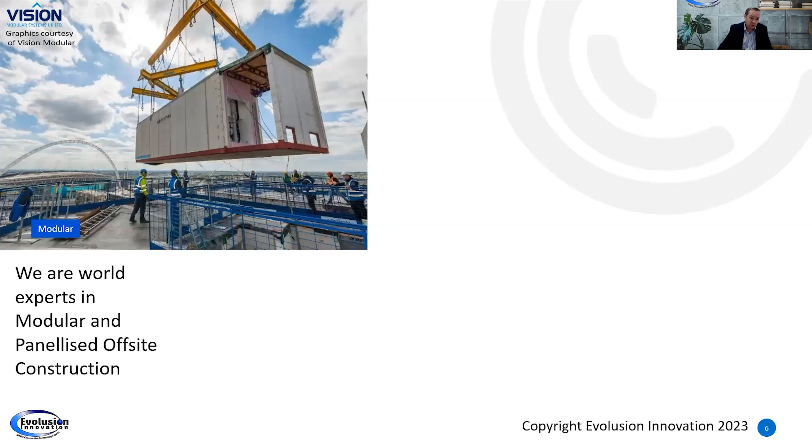Just a quick brief overview: we're in existence 12 years. We've grown to 45 in the team, 4 office locations, and our plan is to go to a 6 million turnover in the next 3 years. We're world experts in panelized and modular construction, as you'll see there. So you're seeing some examples of what we do. Basically, we're comprised of 4 departments within Evolusion.

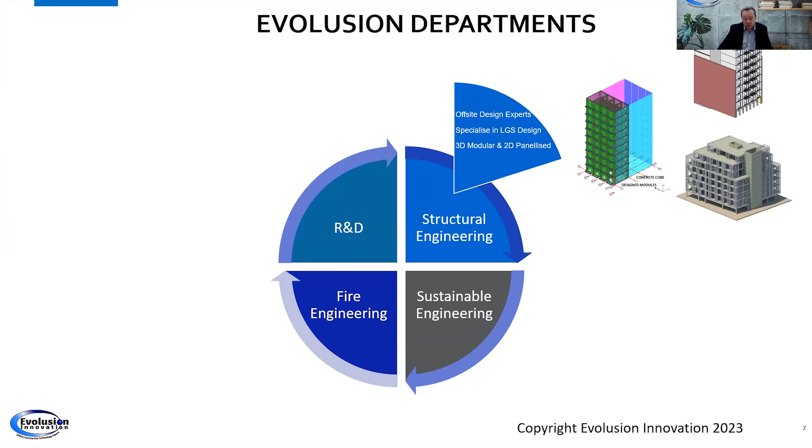Our first department is structural engineering, and we specialize in light gauge steel and 3D volumetric design. The second area is really in the R&D sector, and this is where today's talk will focus. We specialize in getting third-party certifications for MMC products, and we help companies develop the products, and we manage structural fire testing.

We would do about 75 structural fire tests a year, varying across all sorts of tests for different manufacturers. Our new area of expertise is thermomechanical modeling for high-risk buildings, particularly high buildings, where we do a lot of heat transfer modeling and thermomechanical modeling. It's a new area coming from the Building Safety Bill in the UK. We also have a sustainability department, which focuses heavily on embodied carbon value engineering.

So it's a big part. Obviously, embodied carbon is huge, and we have a big department in that. So as you can see, it's all interlinked. We have structure, we have sustainability, and we have fire, basically.

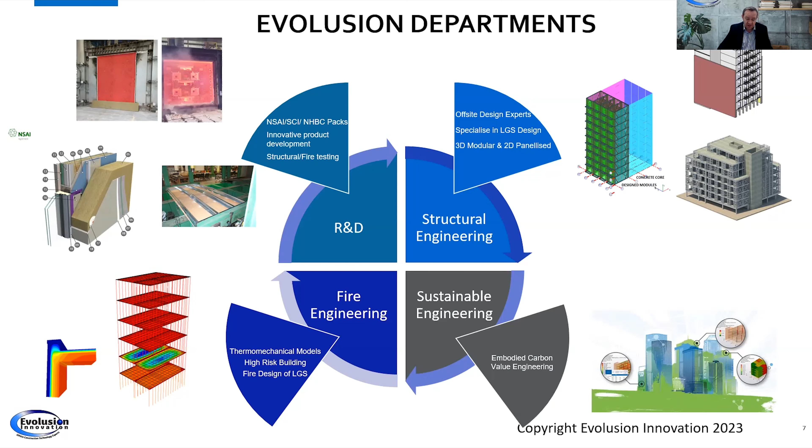We offer loads of certifications, and all these certifications, where appropriately, are third party independently certified. So the final slide on us.

Just to show you our track record, we've done over 2,000 educational buildings, 2,000 healthcare, 8,000 hotel beds, over 10,000 in the resi sector, and over 12,000 student accommodation sector, all in the MMC sector. And we're central to developing and certifying over 20 different building systems in the UK and Ireland.

So today, as mentioned, most of you are probably familiar with the categories of MMC, but in the UK and Ireland—I'm conscious we have a lot of people from the States here on the call today—we have these 7 categories. I'm not going to bore you, but today we're going to focus on category 1 and 2.

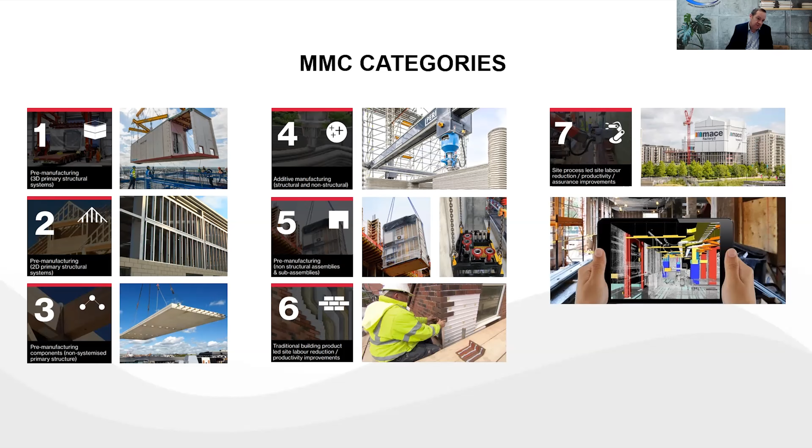Category 1 is 3D volumetric, and category 2 is what we call a structural panelized system. We have the other 5 categories, and we work in the other areas, but today's topic on fire is going to focus on the first 2.

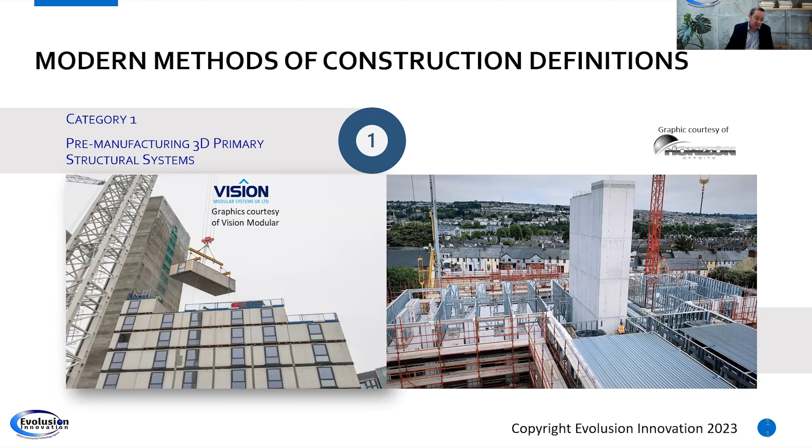So just so we're clear, on the left-hand side there, you see a typical category 1 system, which is a 3D volumetric system. On the right-hand side of the screen, you see a typical structural LGS system. All the systems today are structural. So you can see the difference in the technology—one is a 3D volumetric, and the second is a 2D panel system.

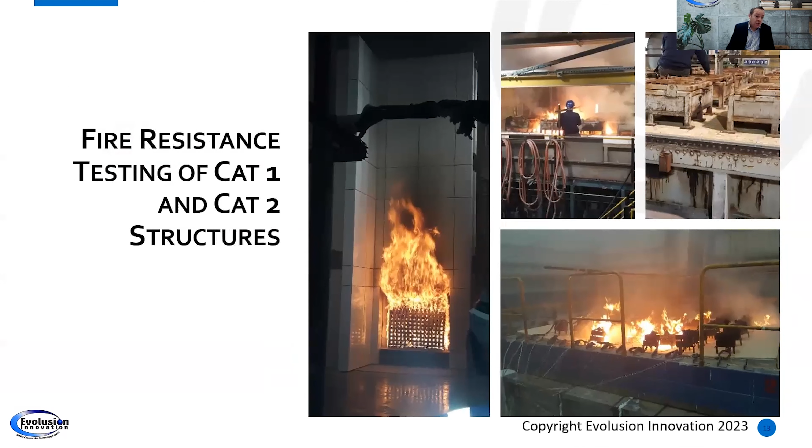So today we're going to focus, as I said, on fire resistant category 1 and category 2 structures. Before we get into that, I'd like to clear up something we find from a lot of people in the industry about non-combustible products. We have a standard called EN 13501 in Europe, and that recognizes combustibility of products.

It's very important that everyone on this call understands that non-combustibility does not mean any good fire resistance. It's very important, the classification of fire spread—that's got to do with flame spread, ignitability, smoke production, heat release, and capability to produce flaming droplets. So it contributes to the fire.

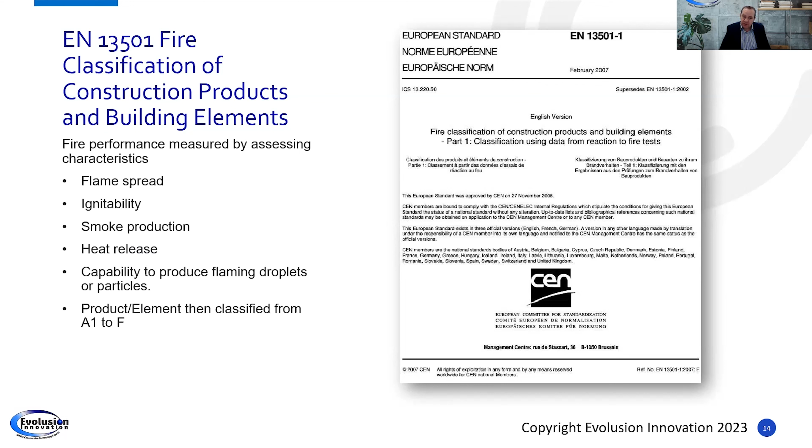But what's very important, the misleading thing we get with some of these products, is that a non-combustible product doesn't necessarily mean the product is any good at fire protection. It just doesn't add to the fire, and that's key. A lot of people use products and materials that may be non-combustible but have no fire resistance, and they're being used in fire resistance situations. So it's very important people understand the difference between non-combustibility and fire resistance—they're not the same at all.

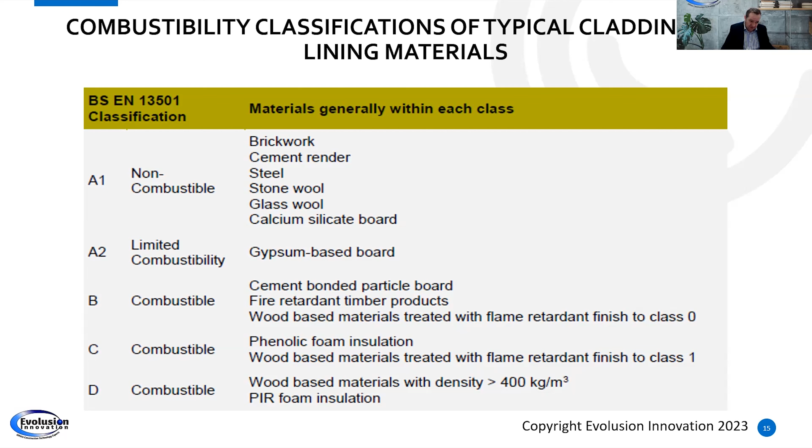So examples of products—obviously A1, A2 is ideal. Brickwork, steel, concrete are all A1, gypsum-based boards are A2, and then we go down the line to say wood-based products would be D—like some OSB board, PIR insulation, different types, etc. But the key thing here is it doesn't guarantee fire resistance. It's very important, and obviously if you can use an A1 or A2 product, fantastic—that's better—but it doesn't provide fire resistance.

Okay, so today we're going to talk about testing regards walls, floors, indicative testing, column testing, penetrations, and BS 8414 and full-scale testing.

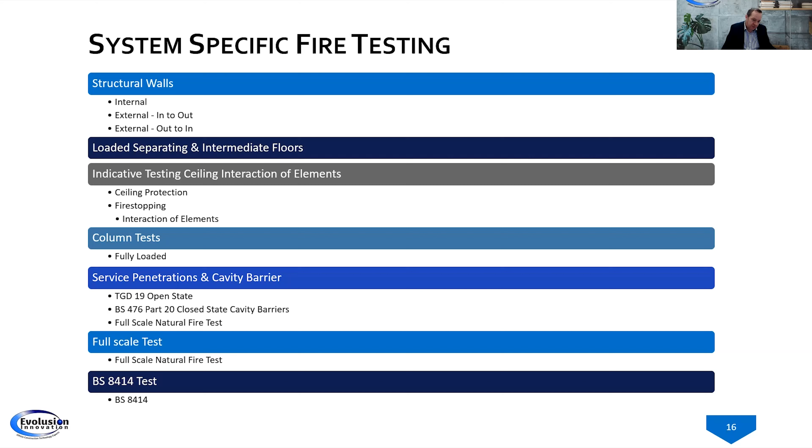So just a quick one, and this is the same table, basically it's in the UK regulations, and I'm going to focus on the Irish and UK regulations in particular. The key thing we're showing on this slide is REI, the REI of the walls and floors, and all I'm talking about today is structural fire testing.

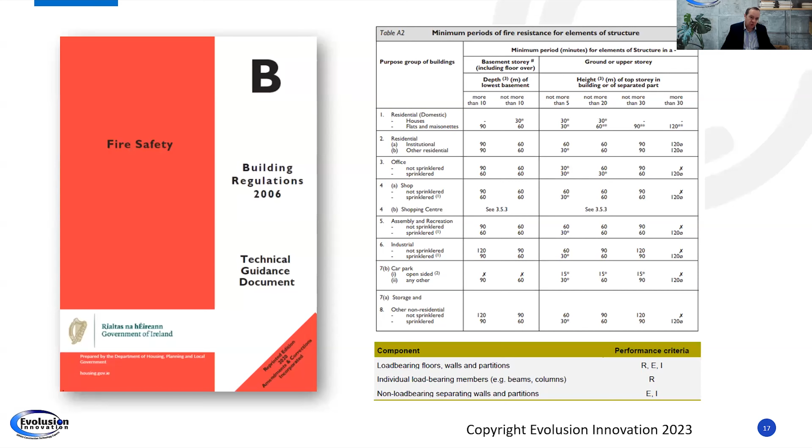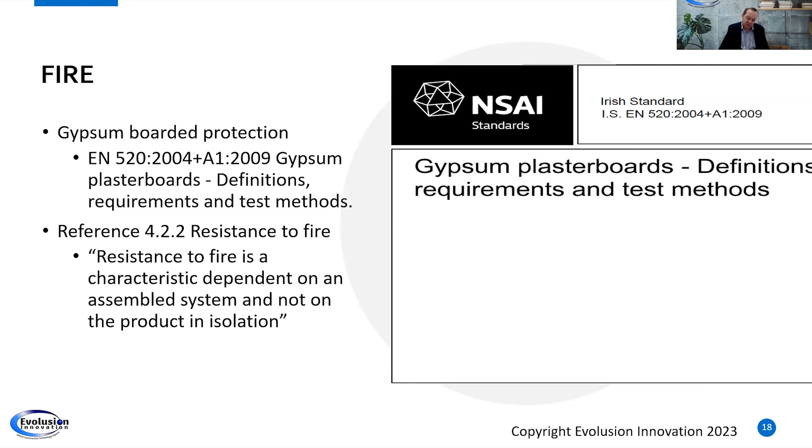Before we get started, common to Ireland and UK, we have a standard for plasterboard, and what came out of the Hackitt report is that the plaster manufacturers went back to the statement: resistance to fire is a characteristic dependent on the assembled system, not the product in isolation. So just because you have a product, a board, most of these systems are protected with some sort of board. The key thing is even the standards tell you the board has a resistance, but it must be tested with the system, and it's so important you have to test the system.

Starting off simple, these are loaded wall tests. We typically do loaded wall tests. What's key about these is they're done to EN1365, part 1. So what's key here is the adequate detailing of services - have we tested services in the walls? The importance of load is critical, and temperature of the steel for the duration of the test. And all testing is generally with type F boards, which is very important with fire resistant boards.

Today, when we talk about modular and panelized, we work in timber as well, but we're really going to focus on steel today because steel tends to go a lot higher, and we go quite high with some of these buildings, as you'll see. So today we're focusing on steel primarily for the example.

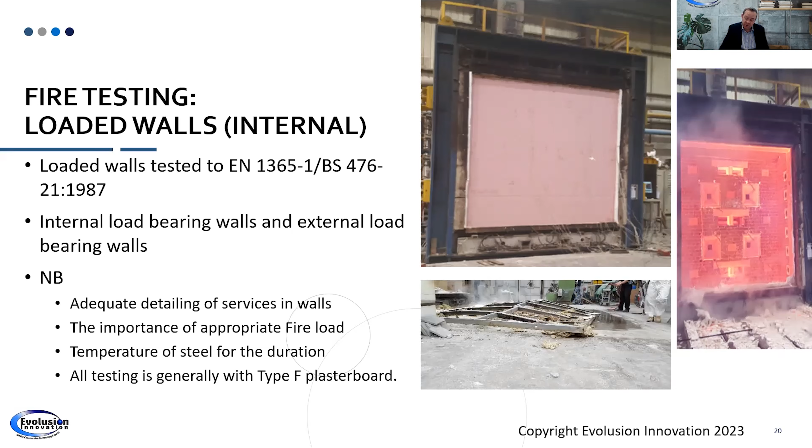Just showing you here visually what a test looks like - it's basically a 3 meter by 3 meter test. What you're seeing on the outside is the back of the test rig with all these rows of thermocouples. The second picture is the exposed furnace side, and you can see we've included sockets to test the sockets in the wall. And what you're seeing on the inside is a view from inside the furnace, through a period of an hour or so through the test, so you can see the severity of the fire and how the wall was performing.

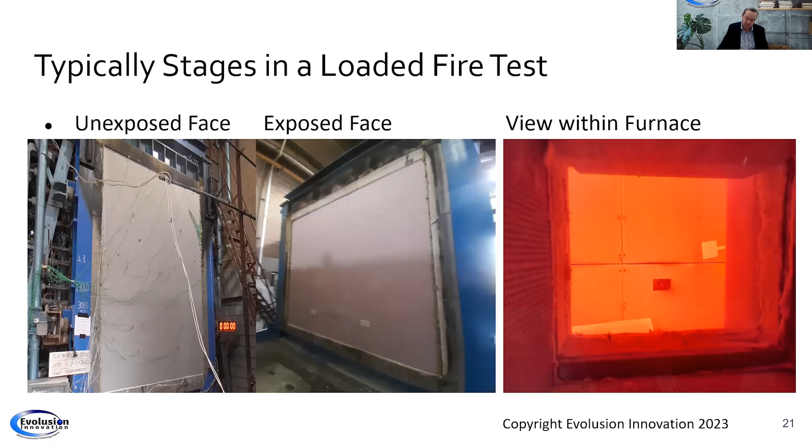Going on with the test, this happens to be quite a long test, kind of a 2-hour test. You can see here the first board has fallen off, and the second board has kind of lasted. This is after the test, after it's been pulled out of the furnace - that's what the inside of the panel looks like. Now this test would have passed, as you can see it lasts just over 2 hours. This is the unexposed side, and this was the inner side. So it's just an example of how visually a loaded test works, and they're very severe.

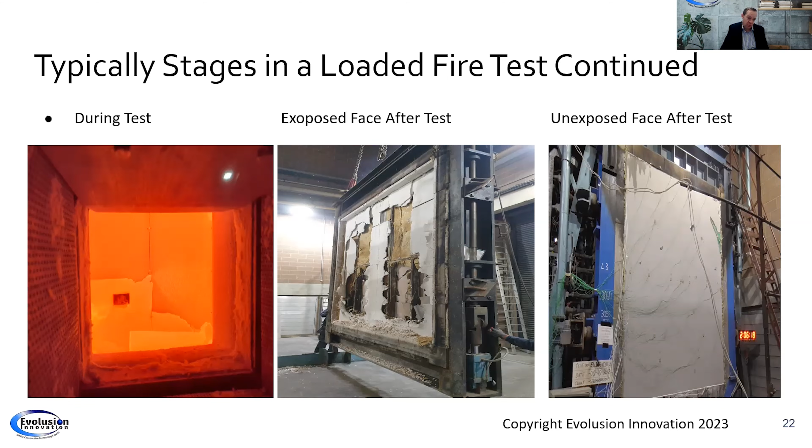Just a very quick one on testing. What's very important when you do testing is you need to know what you're doing. Where Evolusion assists is that we design these tests to comply with the test standards, but also to get additional data for future assessments. And that's very important, because all the labs we use are UKAS approved, and they cannot consult, they cannot advise you.

When you go to a test, they will let you test it incorrectly because they'll just say the test is not compliant. They're not allowed to consult - there are very strict rules around their certification, so they cannot consult. So that's where we come in and we advise how you do these.

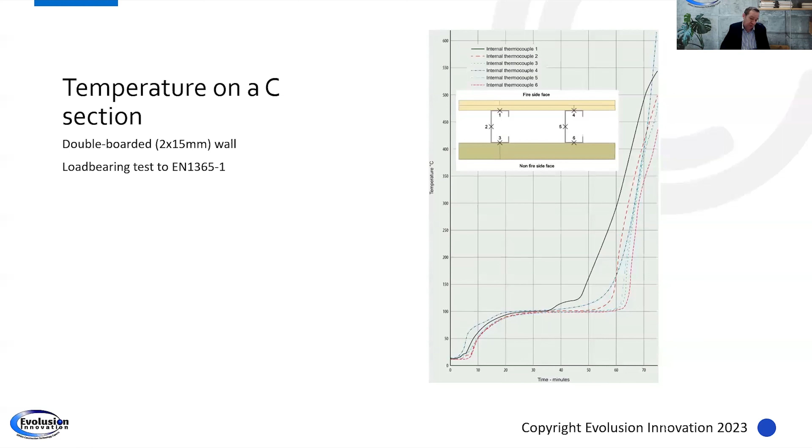What you're seeing here is we're putting thermocouples on the steel studs. Even though this is not in the test standard, this is more important than the test standard itself, because we need to know the temperature of the steel. It's very important, even though that's not in the standard, you have to do this.

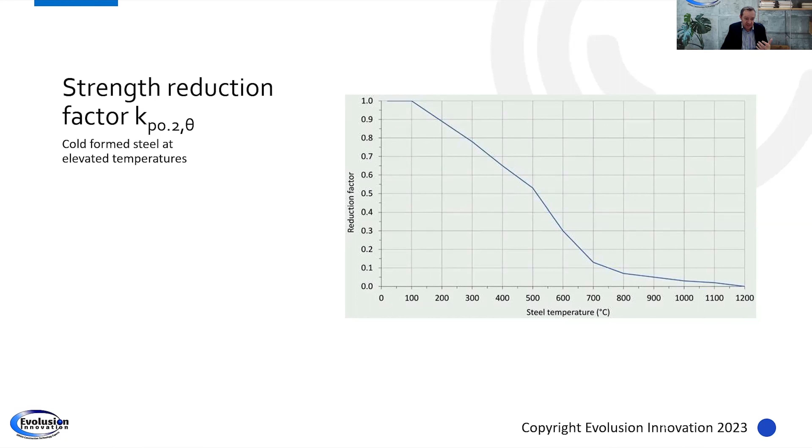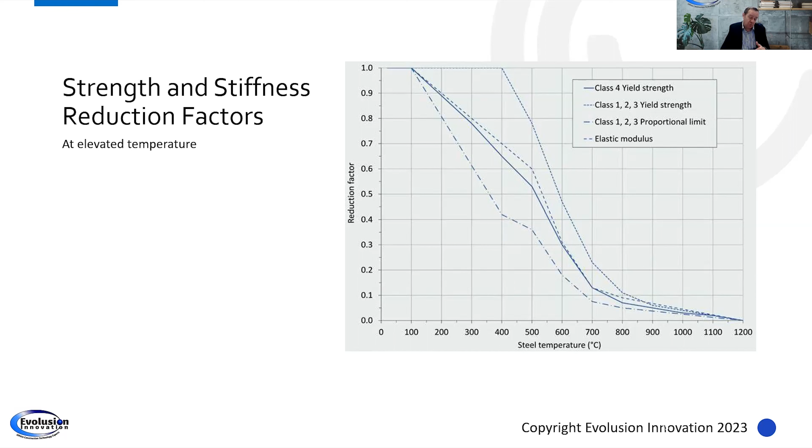Why is this? Because steel will reduce in strength as it gets hotter - it has what we call a strength reduction factor. When we talk about steel sections, there's a myth about steel - we've got class 4 sections and class 1 sections. A class 1 section would typically be a hot rolled steel section, but in practice there are very few hot rolled steel sections used because it's quite expensive steel. With class 1 sections, they lose their strength at 550 degrees, but other sections lose their strength much earlier. So it's very important that we're tracking the temperature of the steel - that's more important almost than the test passing itself, getting the REI.

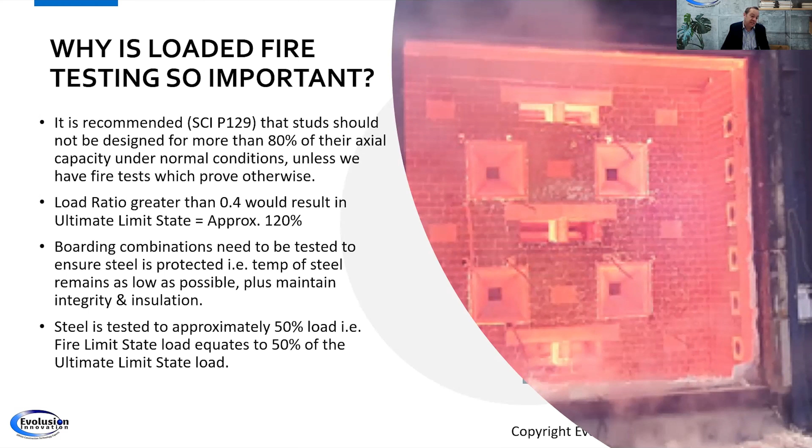So why is load so important? It's because the studs should not be designed to more than 80% of their axial capacity. We look at a term of boarding, and we have a load ratio - not to bore you too much, but ultimately the steel is tested to approximately 50% of the actual load, and the fire limit state is 50%.

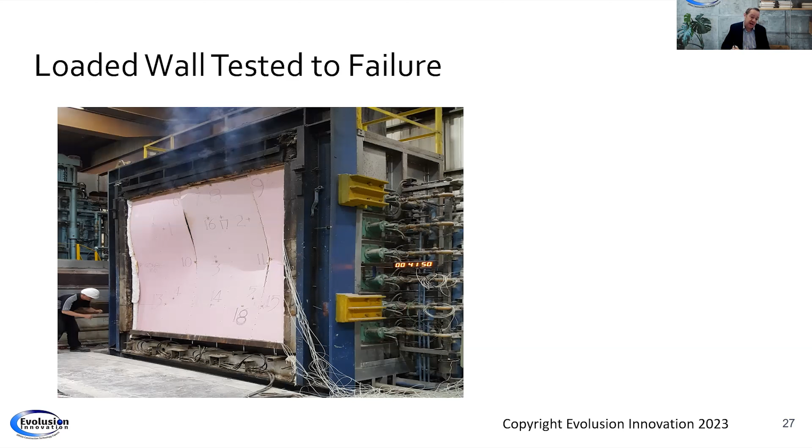What you're seeing here on the screen is an example of one that would be tested - this is a 30-minute test, and you see it got 41 minutes. We always test to this - we generally test to destruction because that's very useful. We like to get an extra 10% in our test, so this is really a 30-minute test. The longer we're getting information, we get more information on how the steel is reacting over a period of time. This would typically be a single boarded fire test.

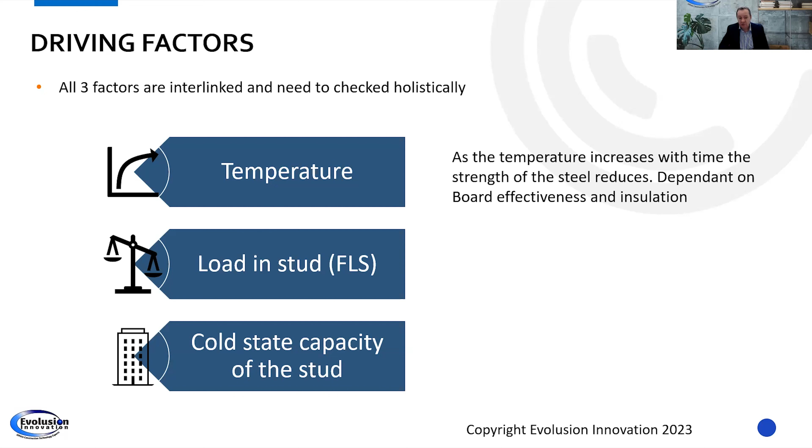So, driving factors - there are 3 key driving factors when looking at one of these tests. Temperature is key: as the temperature increases with time, the strength of steel reduces, depending on the board effectiveness and insulation - that's very, very important. How hard the stud is working in a fire situation is also important, it's called the fire limit state. And then, of course, we have the cold capacity of the stud - what is the normal capacity of the section as it's designed.

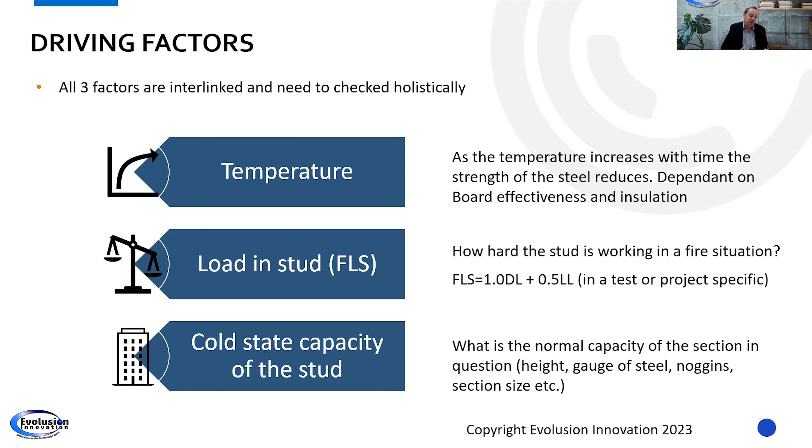Now, I don't want to confuse too much, but this is very important and it can be very complex - this is really structural fire engineering, and you need to understand this. That's why when we do these tests, we're really obsessed with the temperature data of the studs, and then we know what the studs can be designed to. That should ultimately be checked by the structural fire engineers, and hence that's why we have a structural fire department, and our guys would check this in their calculations, which is very important.

A very good document which we were involved in, which we contributed to a couple of years ago and is well worth being aware of, is a publication called SCI P424. Even though it applies to modules as well, it's an excellent document which provides loads of guidance on all sorts of things to do with fire, panels and modules. I couldn't but recommend that you get your hands on a copy of that if you're doing any panelized construction whatsoever.

One other key point to highlight in this document - we get asked this question a lot. As I said, we're generally testing in a lot of cases class 4 sections. When we have a test with a class 4 section, that would basically be a light gauge steel section, maybe 100 by 1.2 millimeters or something, with hot rolled posts in between the studs. So does that need a different test? Well, the answer is no, because it's a heavier section - the heavier the steel is, the slower it heats up.

So if we test lighter steel and it passes at that temperature, then we can obviously use heavier steel, which by default would heat up slower with the same protection. It's just an important note - we get asked that quite a lot.

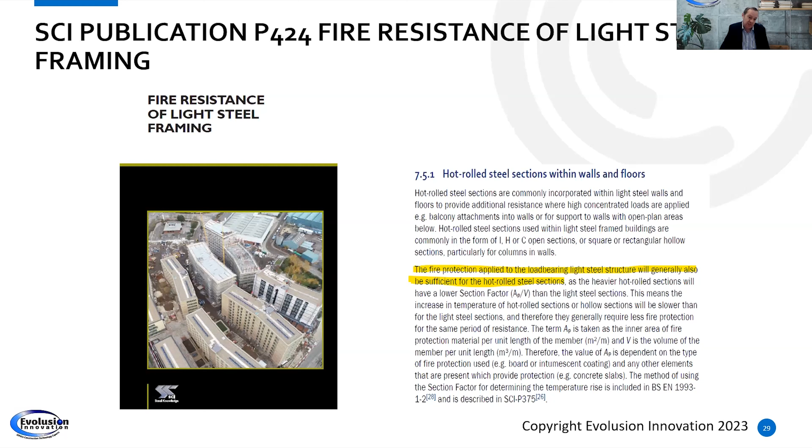So another test on the load bearing testing, and a new phenomenon that's happened in the last couple of years, especially with Grenfell, is out-to-in testing. This is not to be confused with BS 8414 testing, which we'll show shortly. This has got to do with protecting the wall from out to in.

This particularly comes into play where we have, say, a building that would be maybe a 90-minute building, and the external walls are structural walls which then have lightweight cladding. Generally we look at lightweight cladding - in most situations, it might be terracotta, a rain screen, or an Equitone cement board product, basically open joint systems.

So we would assume there is no fire resistance in the outer cladding, and therefore we assume the fire is attacking the wall from inside the cladding. So we generally don't test these with claddings.

This is a very popular test, and we do this now with all our systems to prove that if there was a fire outside the building - I know it might seem severe, but we have to look at that, especially regarding relevant boundaries and neighbouring buildings, this is also very important. You could technically have a fuel load outside the building, maybe a bin store or something, and we have to manage that. So it's really for external lightweight claddings.

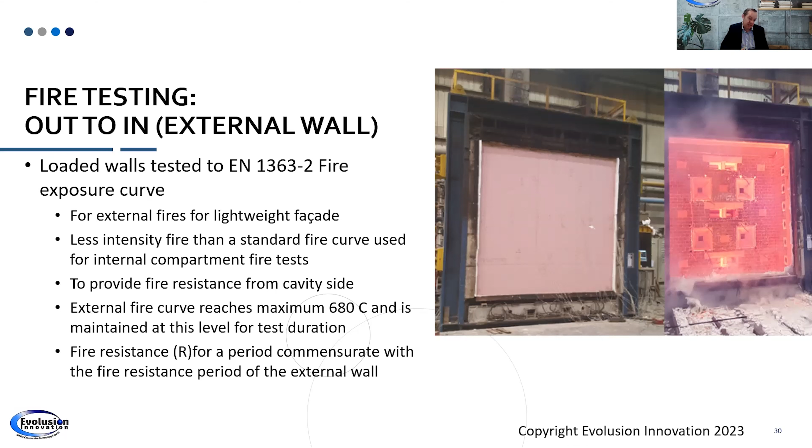Now, you can use the curve from 1363-2, which is slightly less severe because the fire is outside and wouldn't have the same fuel capacity as a compartment fire. But we do recommend where possible to do the higher curve. In this case the curve reaches 680 for the fire resistance. And this is important - we only require an R requirement here, not an insulation or integrity requirement. This is protecting the structure.

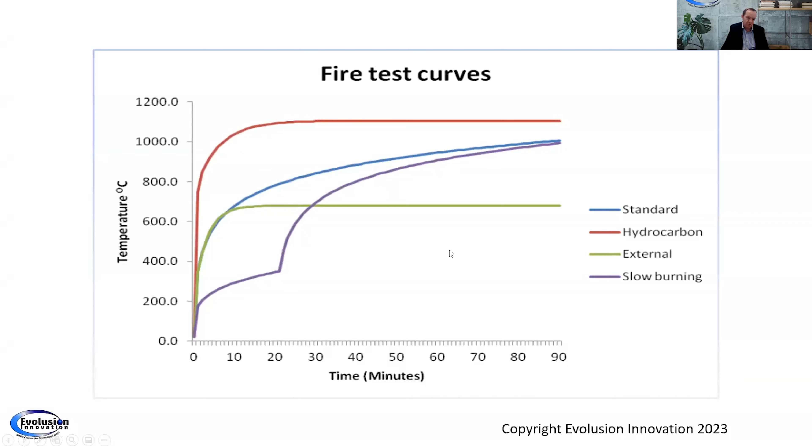So again, when we look at the blue curve we test all our elements to, in certain situations you can use the green curve here, but we would recommend where possible to use the blue curve because it's a more severe curve and it keeps everyone happy. So that's walls covered.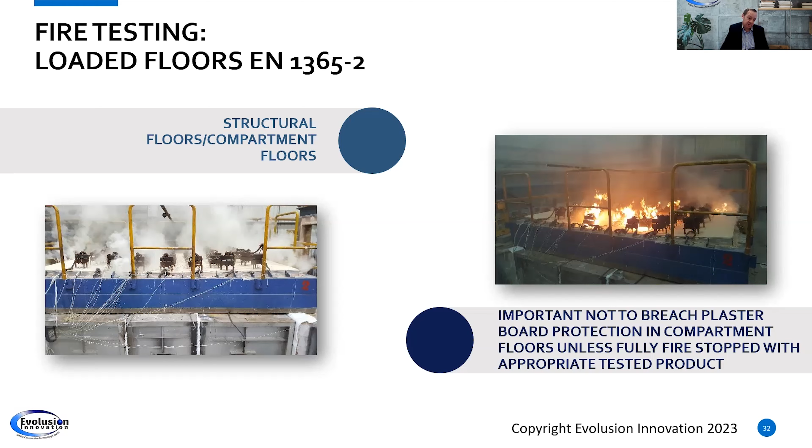Now we'll just touch on floors - what we call EN1365 Part 2. It's a different rig, a big wide rig. This is quite a different test, a different approach. So the service strategy is critical.

The importance of keeping boarding in place is very important here, because unlike the walls - yes they're screw fixed or as the case may be - we have gravity coming into play here. Often what happens is if the fixings get too hot, the boards actually fall off. So the boards haven't lost their integrity; the fixings have got too hot, and the weight and gravity pull the boards down, and you can get premature failure. That's why it's so important to test these floor systems, to make sure when we test these fires that the boards remain in place. So the strategy of keeping boarding in place is absolutely critical.

Can't mention that enough - failure is generally caused by boards falling down and resulting deflection, and then you get very quick integrity failure. Once that boarding fails, you will generally get failure within a minute or two. It happens very quickly.

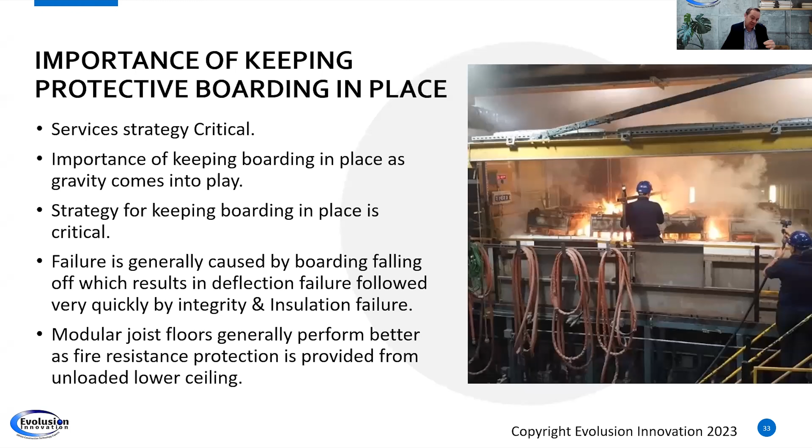An interesting note on modular construction - where we use these sets of floors in modular, they generally perform better than a standard floor, because the ceiling is generally unloaded below, and that tends to last quite a long time. From our experience now, it depends on the system, but we get better fire performance in modular floors.

This is just, again, we always test to destruction, and there's an example of what would happen when we've tested to destruction. What we're trying to show here is the strategy for the services on the floor. It's very important that we have services running in service voids here, but not services here. Different codes in different countries require this, but in Ireland, for example, we don't have services running within the floor. We are allowed to run a service vertically through a floor in a shaft system, but we're not allowed to run a service within the floor.

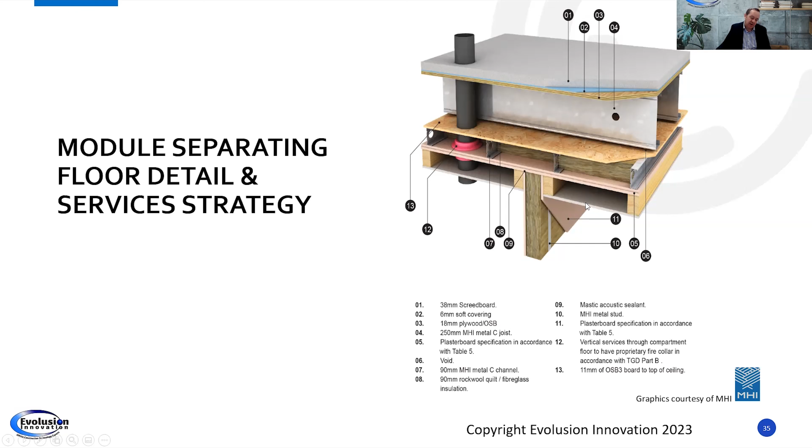So we generally counterbatten or use suspended ceilings underneath the two layers of fire protection and lining.

This would be a typical intermediate floor, used in a domestic house. Something people don't realize is that floor is a structural floor, and it has a requirement to be protected for 30 minutes. It should be protected. Therefore, in Ireland now, for example, any penetration to that floor has to be fire protected.

So what you're seeing here is an example of how you would put, even if there was a vent or a range on the floor, how you put a proper collar and the grounds you need for that collar to put it in properly. And they must be done by licensed installers.

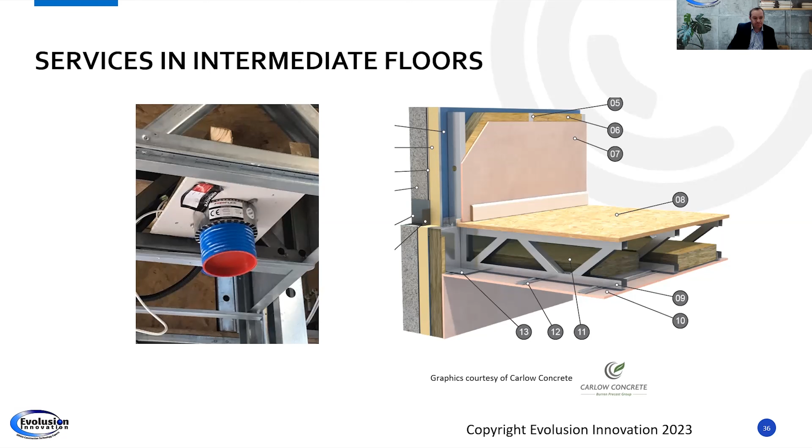So just closing out on that: there are fire tests. What we can do after that, and we're very limited, is something called a field of direct application. Once we've done our testing, if we use two 12.5 mil boards, we can increase the boarding or decrease the height, but the field of direct application is very limited and very conservative. It's kind of only stating the obvious, really.

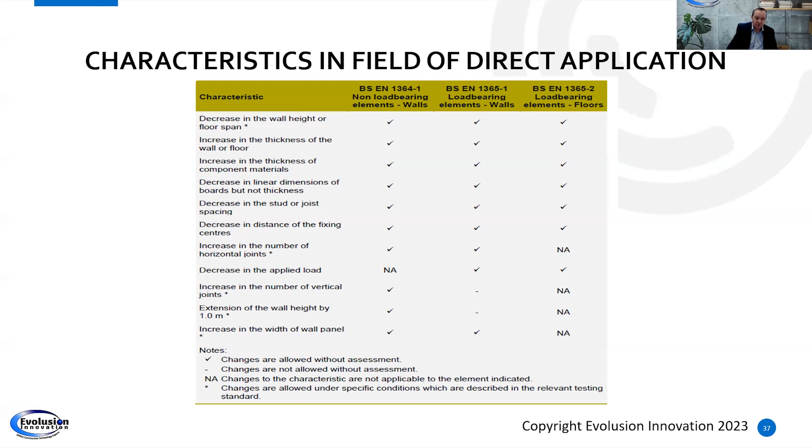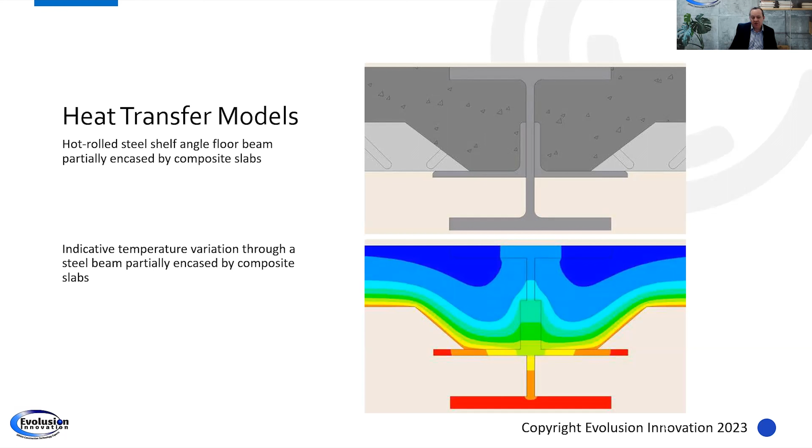So a new lot of work we do now is heat transfer models. These are where we have the data from fire tests, and we get the properties of all the materials. This is very specialist stuff. We've started doing a lot of this with loads and loads of data, and we're able to model these scenarios really, really accurately. That really helps when we plan future testing, knowing the tests are going to pass, or it can help when we have a slightly different situation in a building, avoiding us having to do another test when we have real data on similar materials and properties.

So what you're seeing here is a wall that we're currently doing. You're seeing the model running, exposing the stud from two sides just to give an example of how the stuff heats up and the monitoring involved. It's very specialist work, and we do a lot of that kind of stuff.

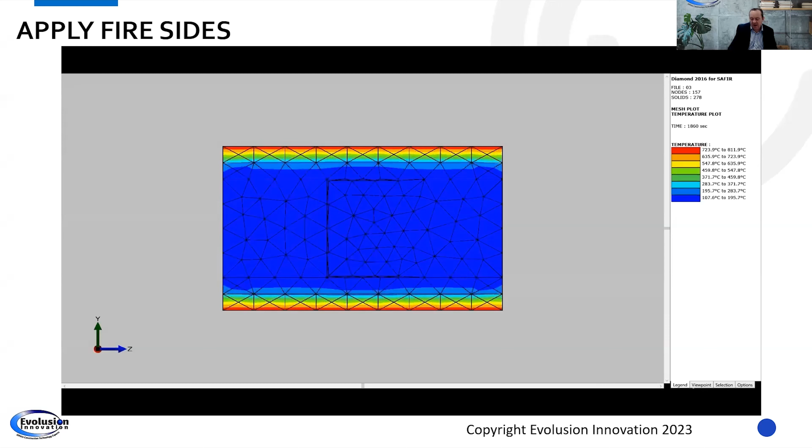Another adaptation now is, as you know, fire has evolved so much in the last couple of years it's hard to describe. So what we're doing now is, because we get loads of questions, we do a lot of what we call interactive wall testing. Before, we had a wall test and a floor test, with simple standards you comply with. With these interactive wall and floor tests, there are no standards, so we have to modify the rigs and test scenarios that are project-specific.

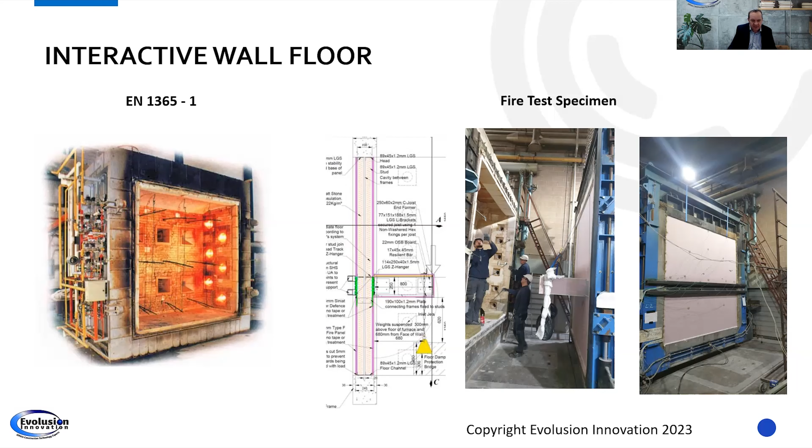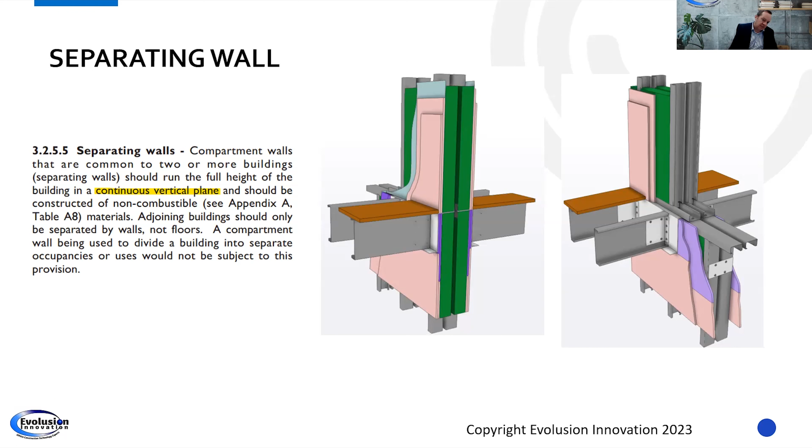So in this scenario, you're seeing an example - it's a world's first. We do loads of these world-first tests that have never been done before because the rigs are designed for different tests. What we've done here is pick the wall that questions were asked about. We have a one-hour wall and a half-hour floor. What happens if the half-hour floor fails? Will it breach the integrity of the wall? We had designed this in advance and knew we would pass, but for the fire consultant and fire officers, we got this test done and proved it worked. These are what we call interactive fire testing, and they're getting very popular now, testing a floor and a wall interacting with each other.

So we now move on to module testing. I think what's most common now in modules, or category ones, there are generally two ways: a uniformly loaded way of loading the module, or a corner post way of loading the module. What's very important is that when a column is outside the line of a wall, it's a column test. When a column is within the wall, it's a wall test - that's kind of a rule of thumb. So when a column is sticking out of the wall, it officially goes into a column test because it has 3-side exposure or 4-side exposure, and that's why we have to do a column test, whereas panels have one-sided exposure.

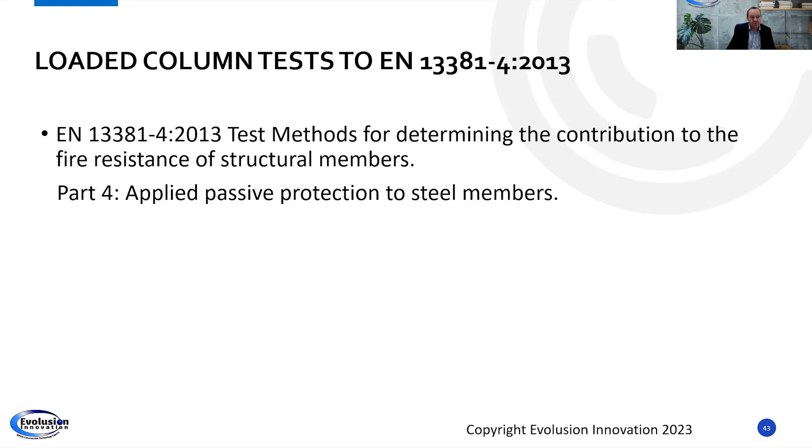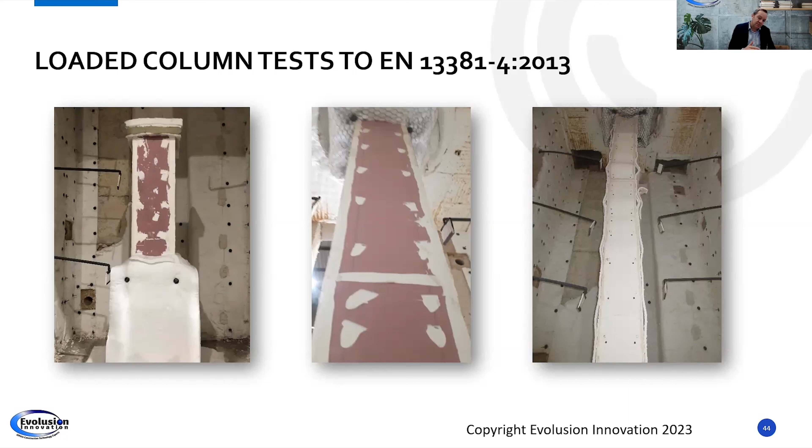So that's very important. This is typically a 13381. What you're showing here is we do a reference column, a small one, and then we do a full column and we load the column. These columns can be loaded to absolutely massive loads. The important thing to learn here is the column will always expand, and once the column expands and then returns to its original length, it has failed.

That's basically it. So again, we do service penetration testing. I'm not going to worry too much with this, but all this testing, we test everything with the system. It's so important that this is all done.

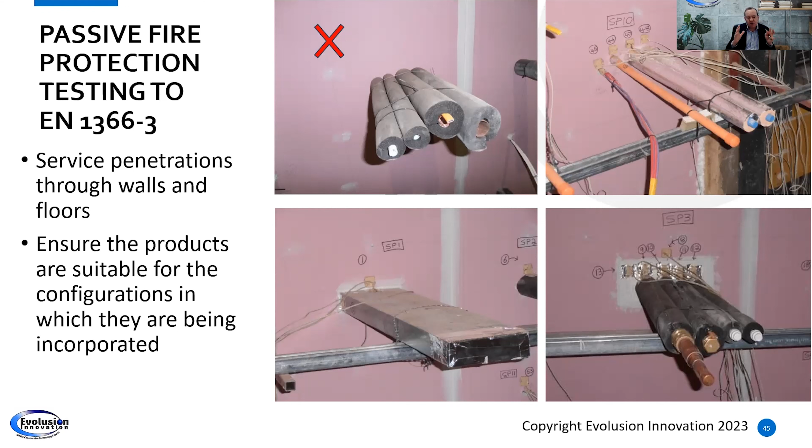Now we're going to just touch on BS 8414 testing. There was a lot of this before, and it was very, very topical around Grenfell. It's a very severe test, a very good test, but it was really designed to test cavity barriers and fire spread within cladding systems. I think that's very important.

There's been a lot of changes in the regulations, particularly in Ireland and the UK. This test was originally designed for over 18 meters. It's now gone back to under 18 meters, and in the UK now, it looks like it's going to go back to 11 meters.

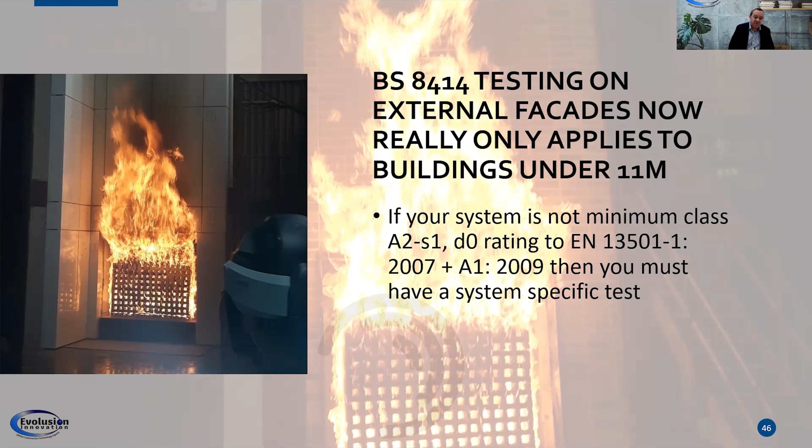So this test is really used where you have material that's not constructed of limited combustibility, like an A2-S1-D0. If all the materials are constructed to A2-S1-D0, you do not need to do this test. If the materials are not of that construction, you should do this test as a system-specific test. But it's really now limited to 11 meters, so it's really only being used now for legacy issues. There's another example there.

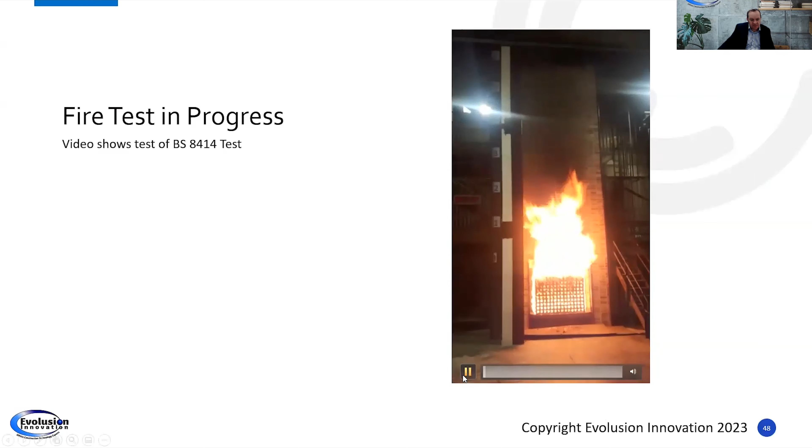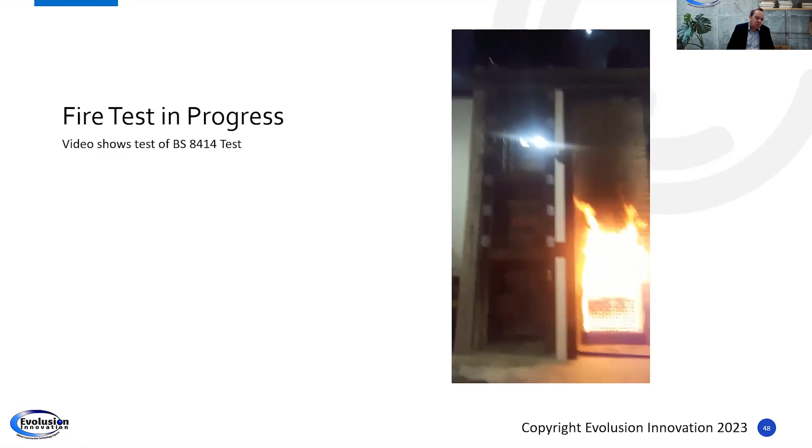I'll just show you a very quick snippet of one of these, see in a couple of seconds. It gives you an idea of the severity of these tests. They're a very severe test, and they were a good test. They have a place. So that's just that one.

Now we move to full-scale fire testing. Full-scale fire testing is the latest thing. The problem with full-scale fire testing is it's incredibly expensive and very complex, and you need to know really what you're testing. There's a previous standard called LPS 1501, which is kind of a scheme you sign up to. But now we're developing new standards for testing these full-scale tests for Category 1 and Category 2 systems.

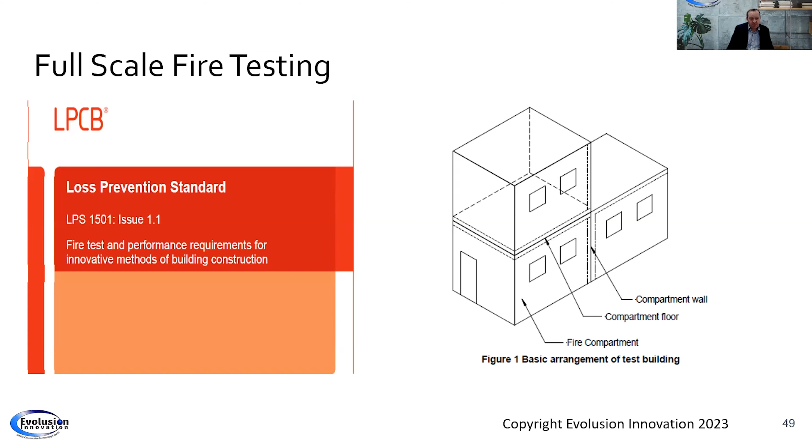The idea of the system is it's testing compartment walls, but it's also testing the compartmentation, the fire stopping, the smoke spread between the units. They're fantastic tests, but unfortunately very expensive. So again, you're testing details like the fire barriers between floors and concealed spaces, these kinds of things, you're testing all of that.

So the purpose of a full-scale fire test is to identify potential modes of failure that cannot be predicted from the results of standard elemental fire tests, to consider the system response when subject to a realistic fire scenario. Now, as I said earlier on, the elemental tests...

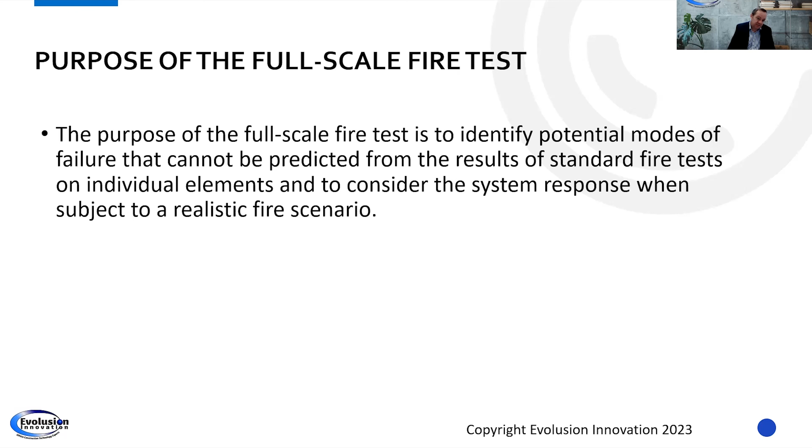From our experience, we've done quite a number of full-scale tests, and obviously we've done hundreds of elemental tests. From our experience, the parametric fire loads wouldn't be as severe as the elemental testing. However, the full-scale testing would identify a weakness in the system that wouldn't have been identified by elemental testing. It could be a junction between a wall and floor, for example.

So again, these are done by just following assumptions. We look at the load density, and the train of that now is we test the full load. When we say the full load, we don't allow for sprinklers - even though sprinklers are very common, and they're very common here as well - we take no allowance for sprinklers, and we're putting in the worst case scenario.

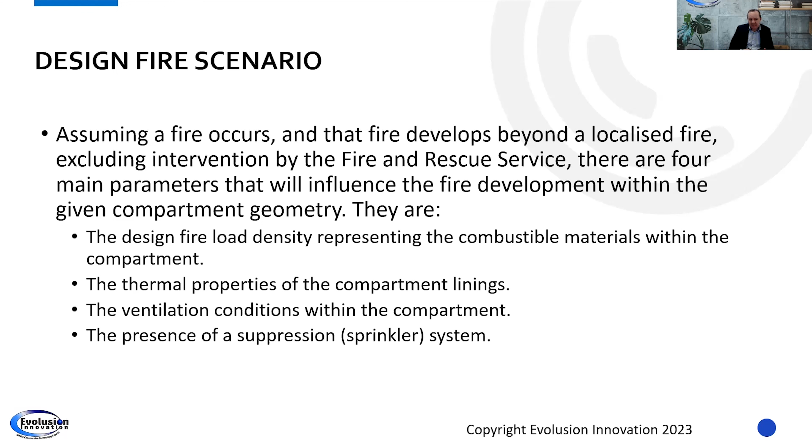And then obviously it's based on the ventilation, so it's covered by ventilation and fuel load. Just to give you an example of this, we're looking at two technical points on this call. So the easier fire is a fast, quick fire. If you had a window, because you need ignition, you need fuel, and you need oxygen for a fire.

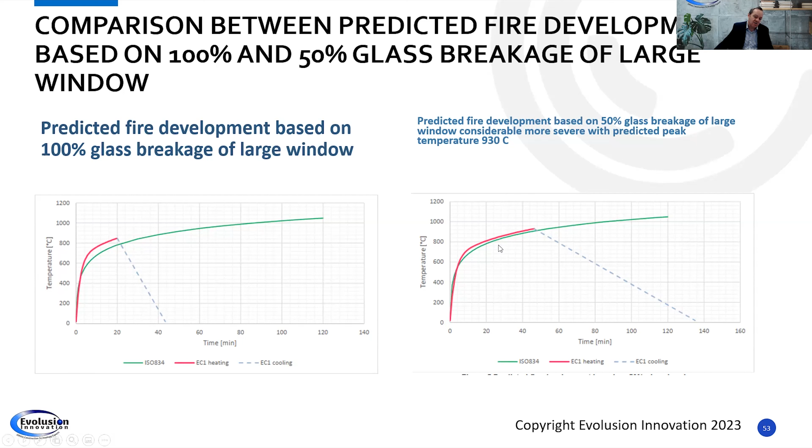If you're going less than 50% ventilation, there's a good chance the fire won't ignite, so we have to have the right balance. The worst fire is a slow burning fire, as you can see, and that will last a lot longer, because that's the peak of the flashover and it falls off.

Okay, so this is just a quick snippet of the kind of severity of one of these fires. Just seeing these, they are incredibly severe, same as the elemental fire test. They're very severe fires, but the issue is they will burn out, because a room can only take so much fuel, so they'll burn out.

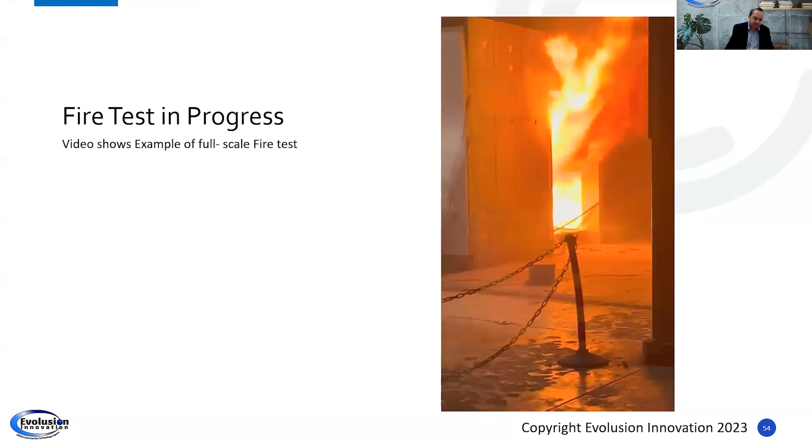So to conclude, loadbearing wall panels, so penetrations in walls are critical. Specialist advice on structural fire testing is required before you start testing. A lot of people come to us with fire testing, and when we get it, it's no good, because people haven't understood what they're trying to achieve in the fire testing. So really, before you start your test, you need to get real experts on board to guide you on what to test and what information you need to get.

Like in all our testing, we would apply probably 50% more thermocouples than the standards require, and that's because we're getting loads of very important data. It's important to us - again, is a product fit for purpose?

So remember, with the Offsite system, the purpose class of building is very important. Again, when you're looking at these MMC systems, by all means, speak to your fire officer, your building control, make them aware of the technology. And once they're aware of it, they will welcome it, and you talk them through it once you've done all the testing. Don't build it and then tell them about it afterwards.

That becomes problems. Remember, field of direct application, as we mentioned, is very limited, so don't rely on that. You can get assessments to EN 15725 - these are special assessments which are extended application. Again, they are more and more limited now than they were. So again, a bit more flexible than the field of direct application, but not much.

And then obviously the importance of service penetration is very important with fire stopping, and it's too late at construction stage. And also, from our experience, you need a very good quality management system on site to sign off the fire stopping, and to check what third-party certifications the system has got.

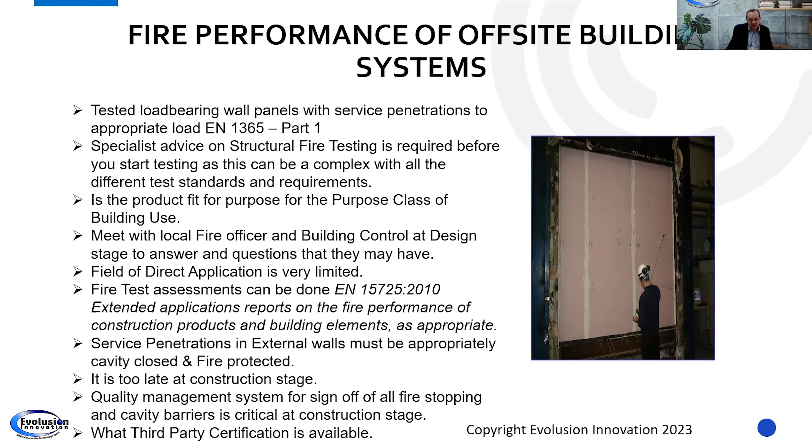So I'm just picking an example of Ireland. In England, we have loads of these, but in Ireland, we've the NSAI. So any MMC system in Ireland must have a third-party certification from the likes of NSAI. In the UK, it could be NHBC accepts, it could be NSAI, or it could be BBA, for example, or BOPAS. So there's loads of them in the UK, and these are very important certifications.

Just to conclude then, this is an example of one of our clients we work with, and these would be the kind of world leaders in category 1 systems. We do all their R&D, and we've worked with them for a number of years. It's what we call Vision Modular.

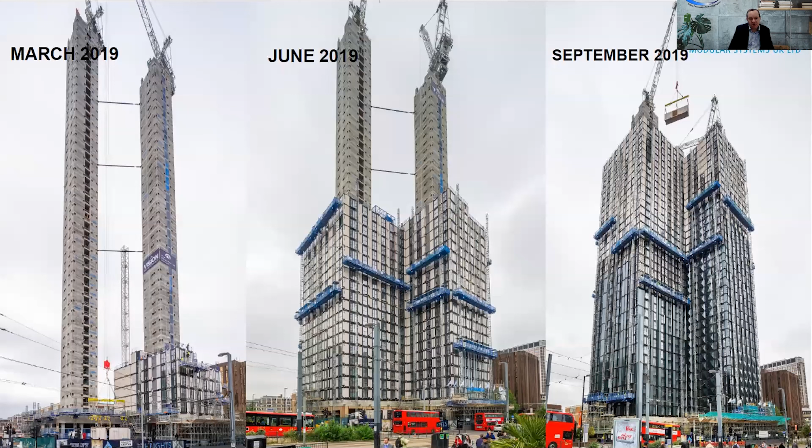But you can see on the screen here, they've built all these buildings, and you can see now they're at 44 stories, and they're actually building a 50-story building at the moment in London. Very impressive stuff. You can see the towers, you can see the speed is unbelievable. It's high rise. Look, this is best practice, how it's done, and they have a really good system.

Now, obviously, all the systems are lower, but this is a good example of what can be done with MMC, and it's obviously sustainable from the point of view that you can take the buildings down again if you had to after use, but the movement off site, and they're faster, and the embodied carbon is significantly less on these buildings as well. And there's a lot of research being done on that now.

Our team are doing a lot of research on that at the moment on this system, but there is very significant savings in embodied carbon on these systems because of the less trades on site, and they have such control of the materials going into the system, so they can really score very well in those sectors.

So I'm very conscious of time, and I think I'm just over my time. I know there's a lot to take in there in that presentation. So I look forward to your questions. Thank you.

Thanks so much, Declan, for making the time to present. I know you're in demand at the moment and have a busy schedule. I think you've shone a light on the complexity of fire testing, which is maybe a reason people stay away from it and defer to experts, but it's really important that people have an understanding, and I think you've done that.

A couple of takeaways I'd have. The first is that, maybe the same way we look at modern methods of construction, there's a pretty significant chance we can deliver better quality and standards for safety for fire, as we do with other elements of construction, same with embodied carbon and other things. But the question I had for you, Declan, is your practice is unusual in that, I know you haven't covered this, but you do a lot of other work within the industry. We get lots of consultancy requests for our products, and that generally gets us caught on how that interacts with fire. For us, we're looking at maybe something like building physics, but you've gone ahead and brought in thermal bridging, building physics, embodied carbon, and it's amazing to have them all together, and clearly really important. While there's a cost, there's probably huge savings in it. But I'm wondering what made you push ahead with all of those areas.